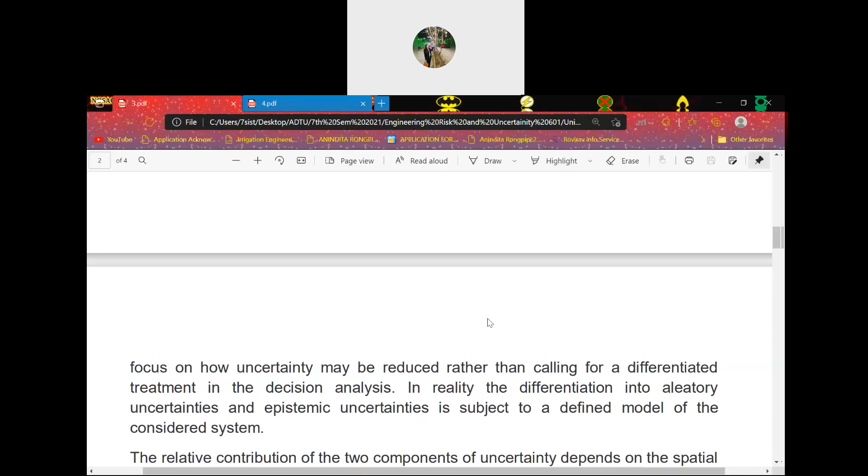In reality, the differentiation into aleatory uncertainty type 1 and epistemic uncertainty type 2 is subjected to a model defined based on a considered system, a system that has been considered by the decision maker.

The relative contribution of the two components of uncertainty depends on the spatial and temporal scale applied in the model considered by the decision makers.

For the decision analysis, this differentiation is irrelevant. Hence, a formal decision analysis necessitates that all uncertainties are considered and treated in the same manner.

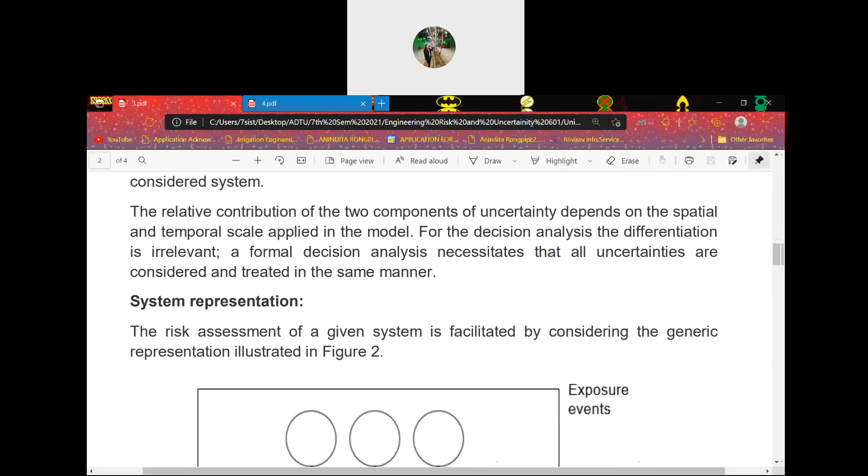Next topic is system representation. The risk assessment of a given system is facilitated by considering the generic representation illustrated in figure number 2, where the first event is exposure of events, the second is constituent failure events and direct consequences, and the third is follow-up consequences.

In short, this is the generic system representation in risk management. The first element indicates the events that have been exposed or considered. The second is the failure of events, constituent failure events, and as a result of those failures, the direct results, and then the follow-up consequences.

So the exposure to the system is represented as different exposure events acting on the constituents of the system. The constituents, that is the components of the system, can be considered as the system's first defense in regard to the exposures. Figure 3 illustrates how results or consequences may evolve in the considered component or system.

The damages of the system caused by failures of the components are considered to be associated with direct consequences or direct results. Direct results comprise different attributes or terms of a system, such as monetary losses, loss of lives, damages to the quality of the environment, or changed characteristics of the components.

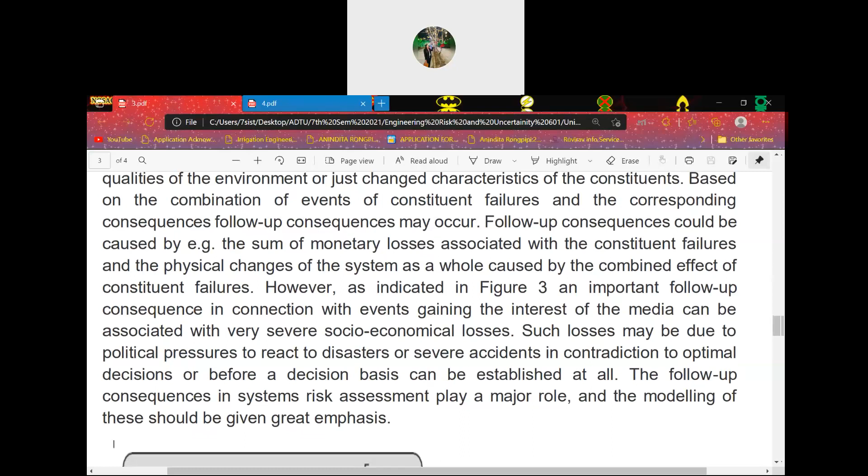These losses may be due to different political pressures. These political pressures in turn react to the disasters or severe accidents, in contradiction to optimal decisions, or before a decision basis can be established at all.

So follow-up consequences or results play a major role in system risk assessment, and the modeling of this should be given great emphasis. Modeling of the risk assessment system should be given more importance.

Exposure, that is the event. Events impose consequences, and the events imposed as results lead to system change. System change leads to vulnerability, which leads again to direct consequences, and robustness leads to indirect consequences. Together, direct and indirect consequences lead to total consequences as a whole.

This system change in turn returns to a perception of system changes, where robustness takes place in socially or societally imposed conditions, leading to indirect consequences. As a whole, these two systems, system change and perception of system changes, lead to total consequences. This is an illustration of the evolution of consequences into direct as well as indirect consequences.

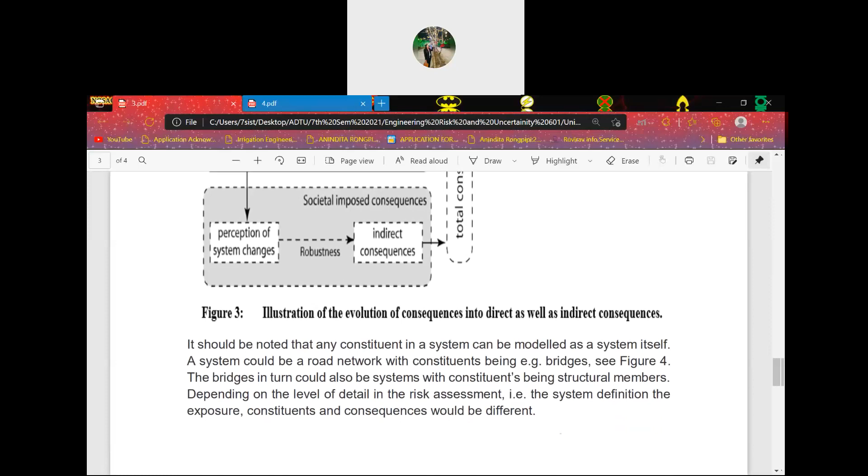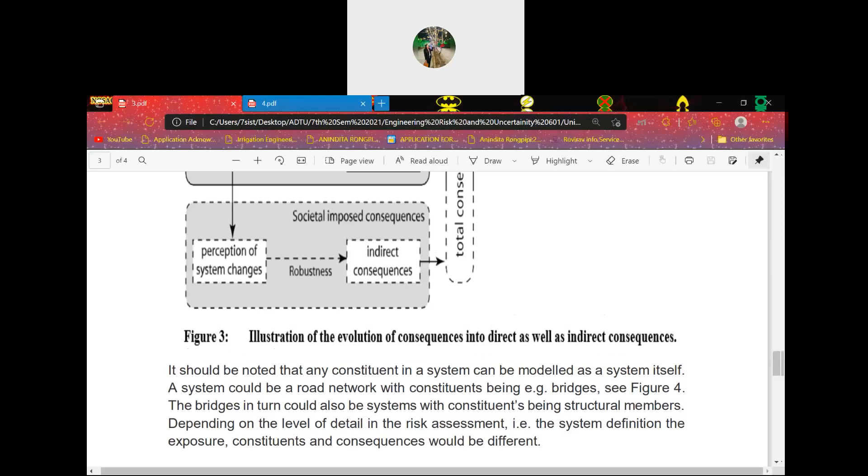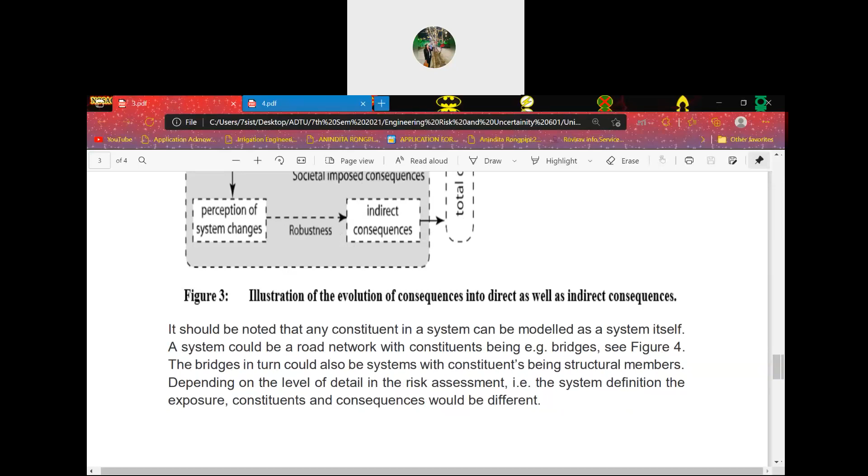From the figure, it should be noted that any component in a system can be modeled as a system itself. So a system could be a road network with components being bridges, and the bridges in turn could also be systems with components being structural members. Depending on the level of detail in the risk assessment, that is the system definition, the exposure, components and consequences would be different.

The vulnerability is associated with risk associated with direct results, and the robustness is related to the degree to which the total risk is increased beyond the direct results. These three system characteristics, which will be defined in the following, are only meaningful subject to the definition of a system as outlined in the foregoing.

This is a generic system characterization at different scales in terms of exposure, vulnerability, and robustness.

Next, exposure and hazards. Exposure of a system is defined as all possible endogenous (internal) and exogenous (external) effects or factors with potential consequences for the system considered. Probabilistic characterization of exposure requires a joint probabilistic model for all relevant effects relative to time and space.

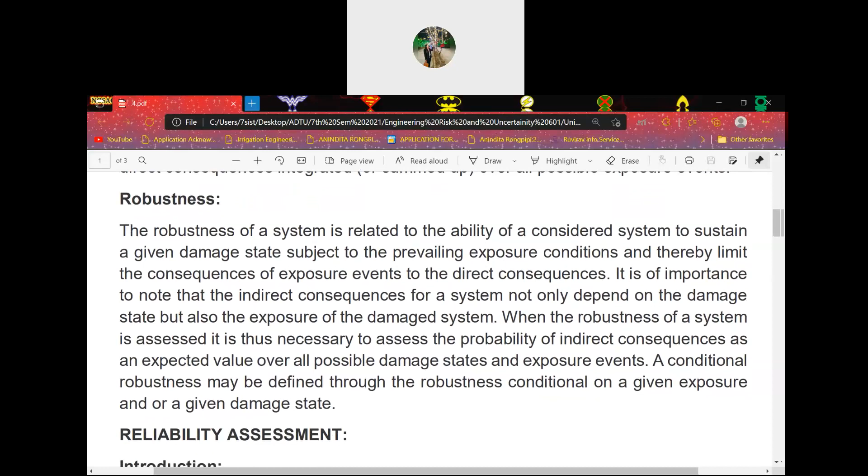A conditional robustness may be defined as robustness conditional on a given exposure or on a given damage state or site. In a reliability assessment, a structure is designed with knowledge about the structure as built, associated with uncertainty regarding geometry, material properties, loading, and environmental conditions.

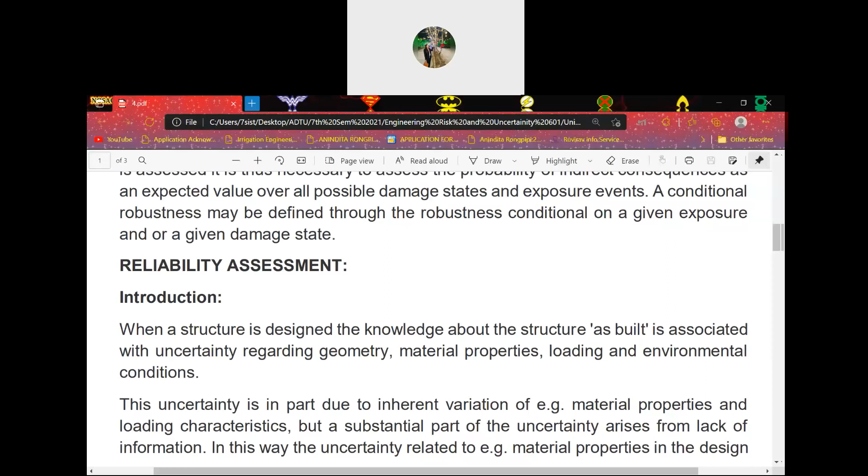This uncertainty is in part due to inherent internal variation, for example material properties and loading characteristics, and a substantial part of the uncertainty arises from the lack of information.

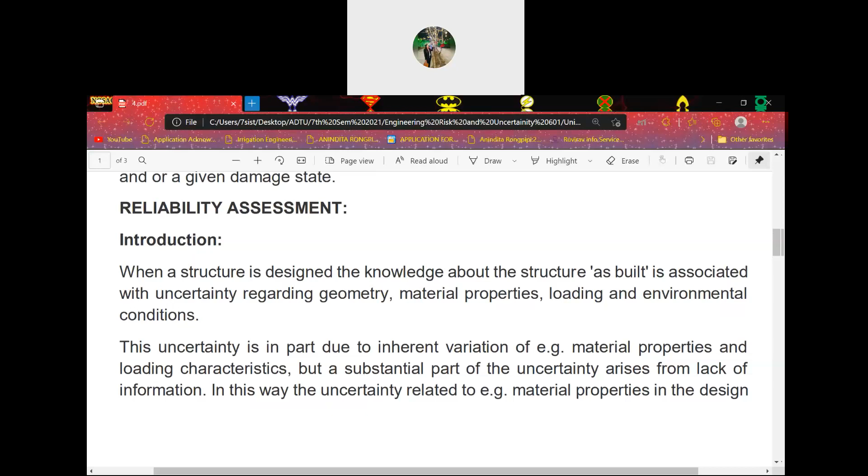In this way, the uncertainty related to material properties in the design phase contains a significant contribution from the fact that the materials manufacturer may not be known, and the material batch characteristics may not be known.

Hence, probabilistic models, mainly Bayesian probabilistic models, are used in the design and assessment of a structure, which reflects the imperfect knowledge about the structure, and this knowledge may be updated as soon as the structure has been realized or released.

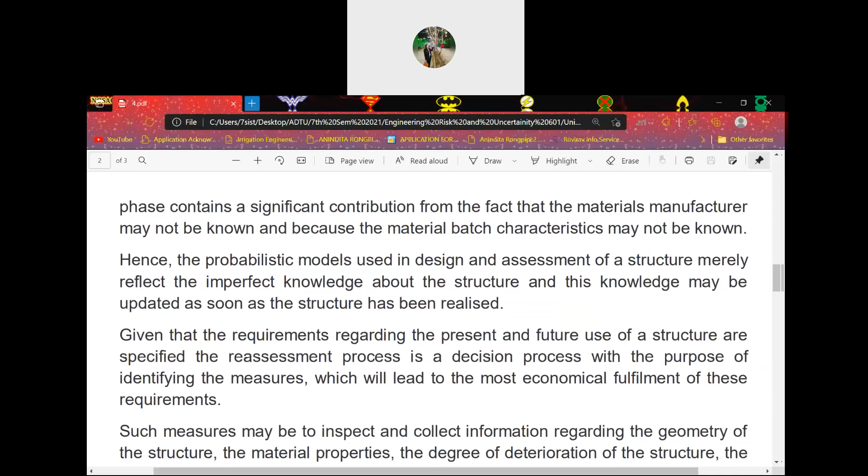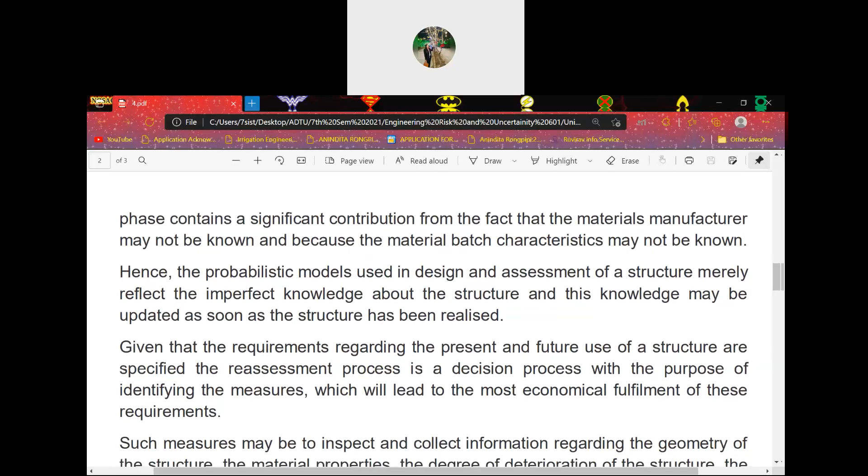Given the requirements regarding the present and future use of a structure, a reassessment process is a decision-making process. The purpose is to identify measures which will lead to the most economical fulfillment of these requirements.

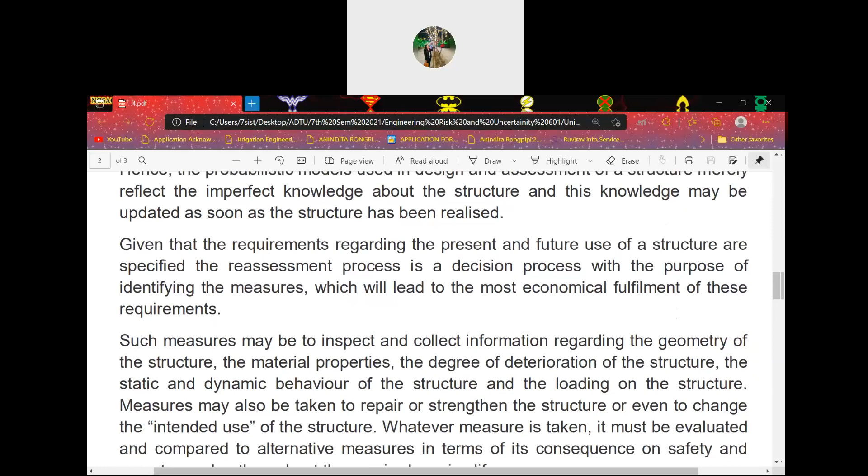Such decisions mainly involve inspecting and collecting information regarding the geometry of the structure, the material properties, the degree of deterioration, the static and dynamic behavior of the structure, and the loading of the structure.

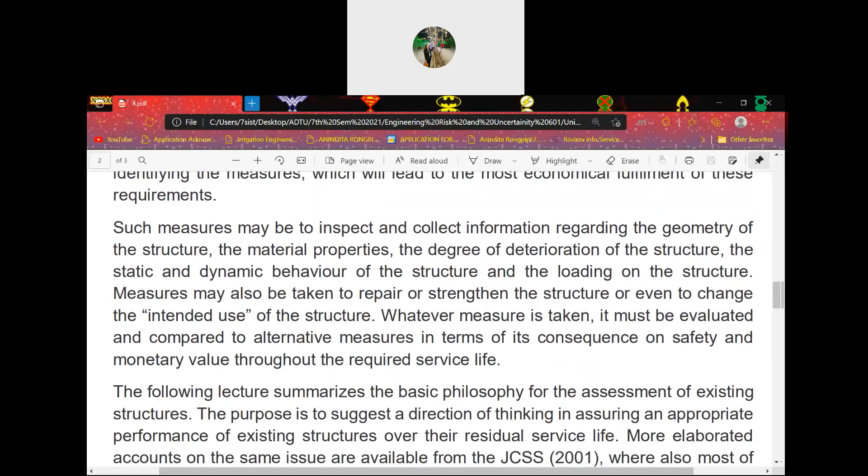Measures or precautions may also be taken to repair or strengthen the structure, or even to change its intended use. Whatever measure is taken must be evaluated and compared to alternative measures in terms of its consequences on safety and monetary value throughout the required service life.

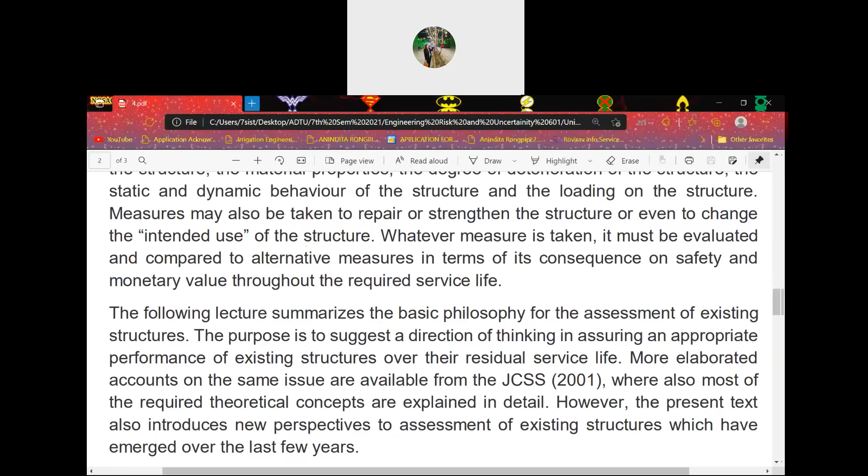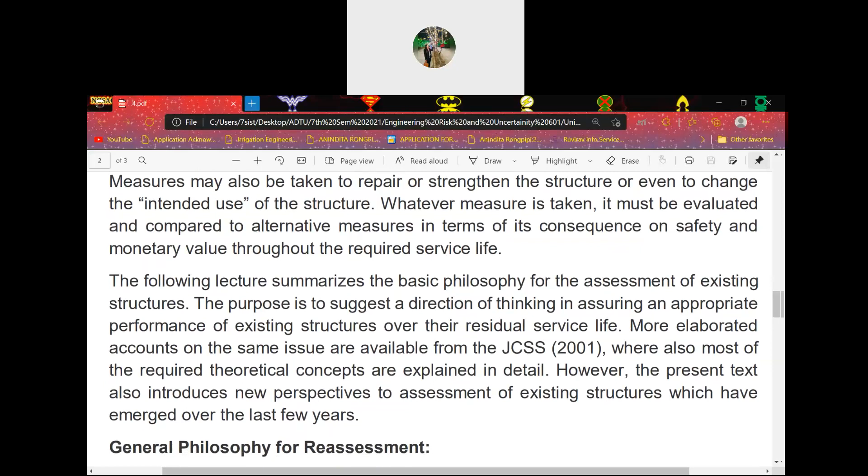The following lecture summarizes the basic philosophy of the assessment of existing structures. The purpose is to suggest a direction of thinking in assuring an appropriate performance of existing structures over their residual service life. More elaborate accounts on the same issue are available in JCSS Journal of 2001, where most of the required theoretical concepts are explained in detail. This text also introduces new perspectives on assessment of existing structures which have emerged over the last few years.

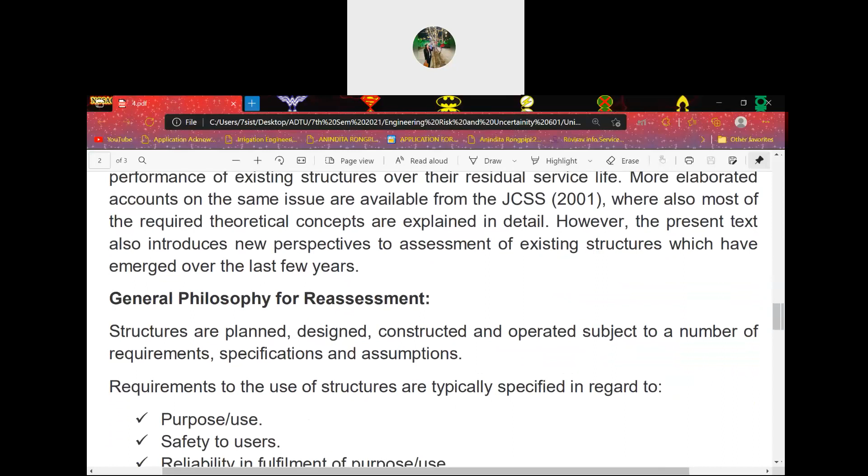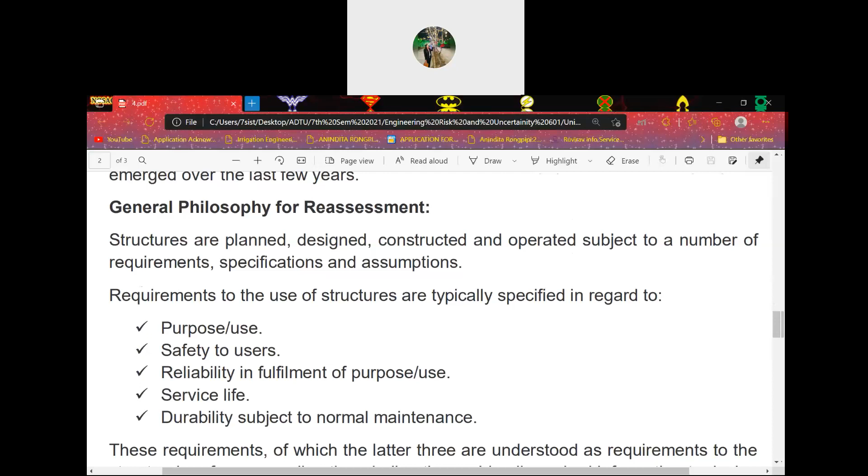Next, general philosophy of reassessment. Structures are planned, designed, constructed, and operated, subject to a number of requirements, specifications, and assumptions. Requirements are purpose (use of the structure), safety, reliability in fulfillment of purpose, service life, and durability subject to normal maintenance. These requirements, of which the latter three—reliability, service, and durability—are understood as requirements to structural performance, directly or indirectly provide all the required information to design a structure.

Generally, the design follows the relevant codes for the design and execution of any structure. These building codes or relevant codes include specifications in relation to the performance of the materials, testing, and quality control.

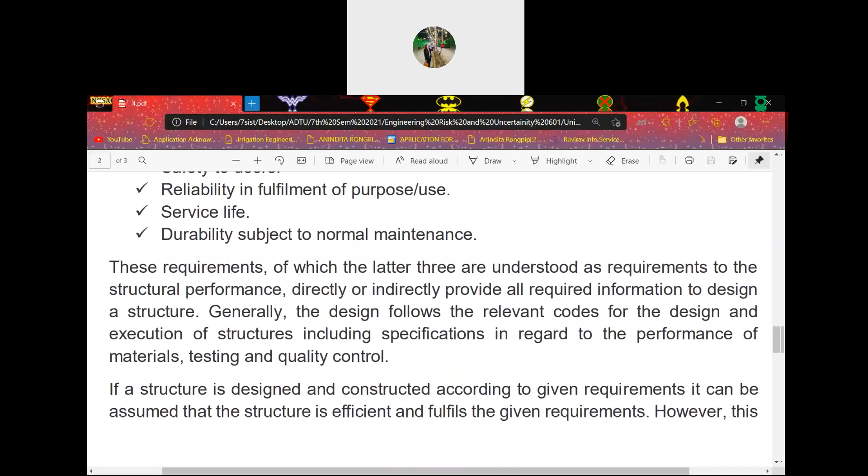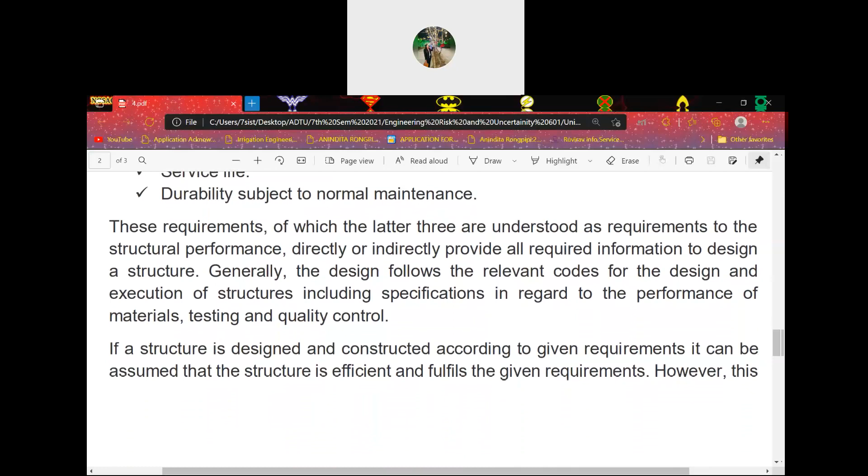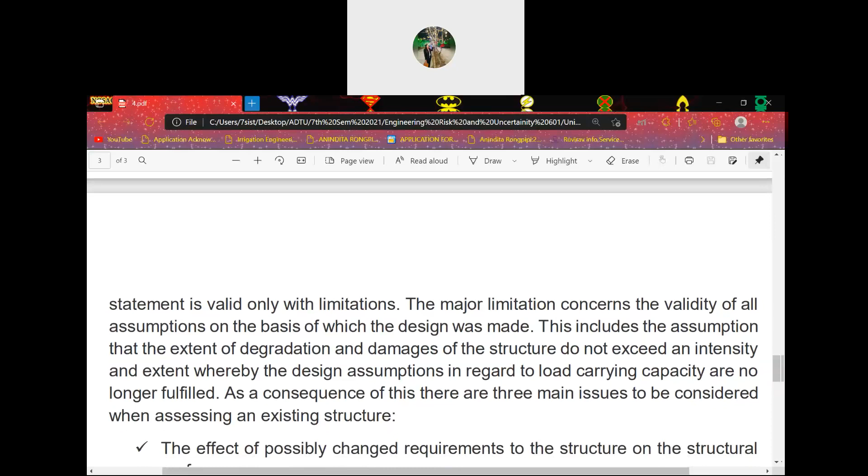If a structure is designed and constructed according to a given requirement, it can be assumed that the structure is efficient and thus fulfills the given requirement. However, this statement is valid only with certain limitations. The major limitation is the validity of all the assumptions on the basis of which the design was made. This includes the assumption that the extent of degradation and damage of the structure does not exceed a certain intensity and extent, so that design assumptions regarding load carrying capacity are no longer fulfilled.

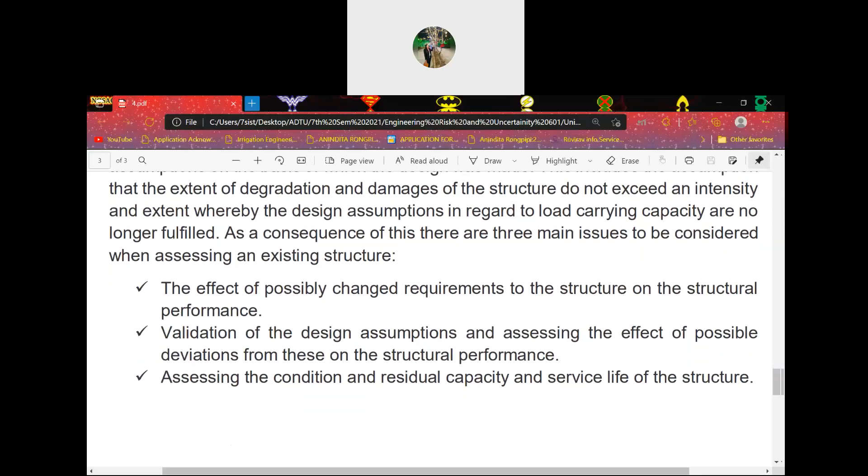As a result, three main issues are considered while assessing an existing structure: the effect of possibly changed requirements to the structure; structural performance and validation of the design assumptions, and assessing the effect of possible deviations from these; and assessing the condition, residual capacity, and service life of the structure.